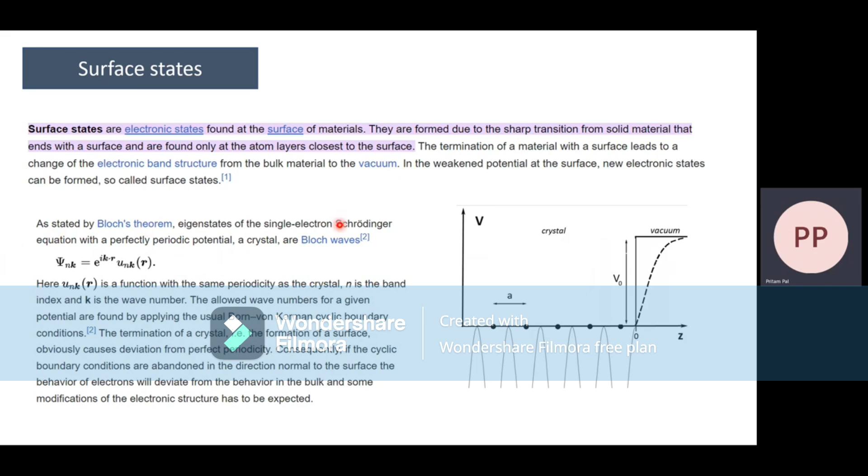So that's figure two. This is the first type of states that's basically extending into the crystal and has a Bloch character. Bloch character means this equation needs to be satisfied over a certain period, with the crystal lattice. That's what the Bloch theorem states, right?

So this type of solution corresponds to the bulk state, which terminates in an exponentially decaying tail reaching into the vacuum. So once it reaches the vacuum, it will decay further. That's what has been shown here.

There's a second type, as seen in figure three, that decays exponentially both into the vacuum and the bulk crystal. So this type of solution corresponds to the surface state with a wave function localized close to the crystal surface. You can see it's also decaying exponentially inside the crystal. So

the first type of solution can be obtained for both metals and semiconductors. In semiconductors, though, the associated eigenenergies have to belong to one of the allowed energy bands. The second type of solution exists in the energy gap of semiconductors as well as in local gaps of the projected band structure of metals.

It can be shown that the energies of these states all lie within the band gap. As a consequence, in the crystal, these states are characterized by an imaginary wave number, leading to an exponential decay into the bulk. Okay. So next, please listen to this part very carefully because this will tell you how the surface states are. This is the typical band structure in an E versus K diagram.

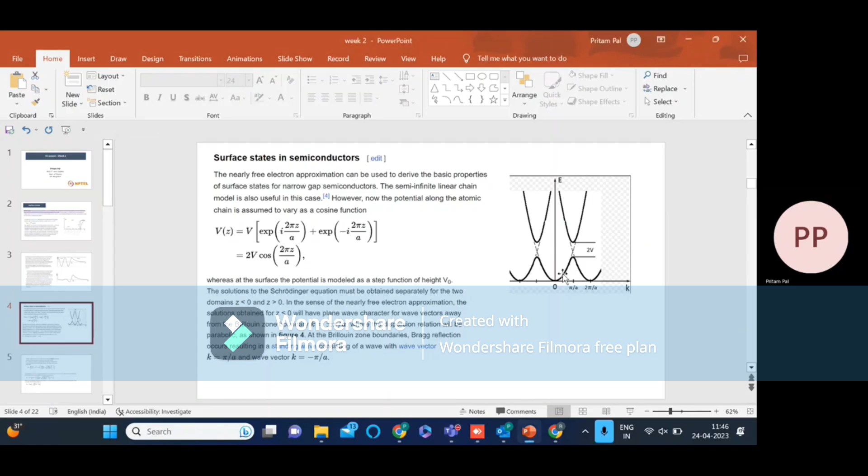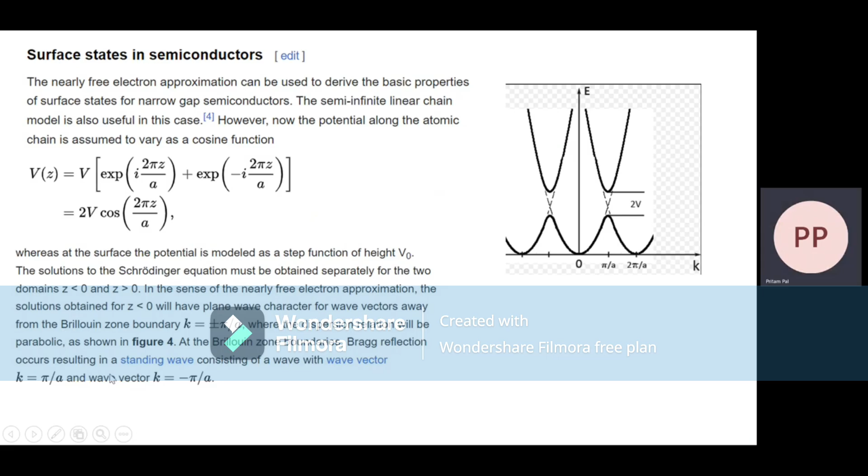This potential, yeah. This part was already mentioned, and this is away from the Brillouin zone boundary, right? Where the dispersion relation will be parabolic, as shown in figure 4. So at the Brillouin zone boundaries, Bragg reflections occur, resulting in a standing wave consisting of a wave with wave vector k equals pi by a and a wave with wave vector minus pi by a, right? So here you can see, let me turn on the curves.

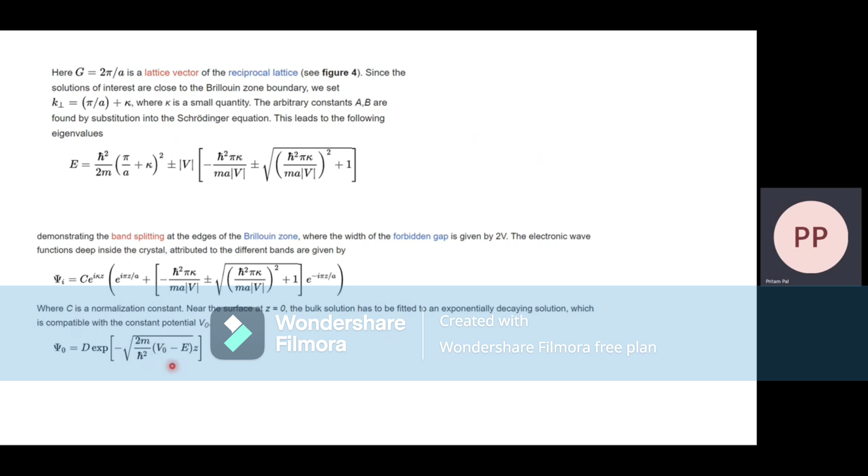Where C is the normalization constant. Near the surface at z equals 0, the bulk solution has to be fitted to an exponentially decaying solution, which is compatible with the constant V naught. So psi naught equals, as mentioned, the exponential of minus square root of 2m over h-bar squared times V naught minus E, times z. So it can be shown the matching condition can be fulfilled for every possible energy eigenvalue which lies...

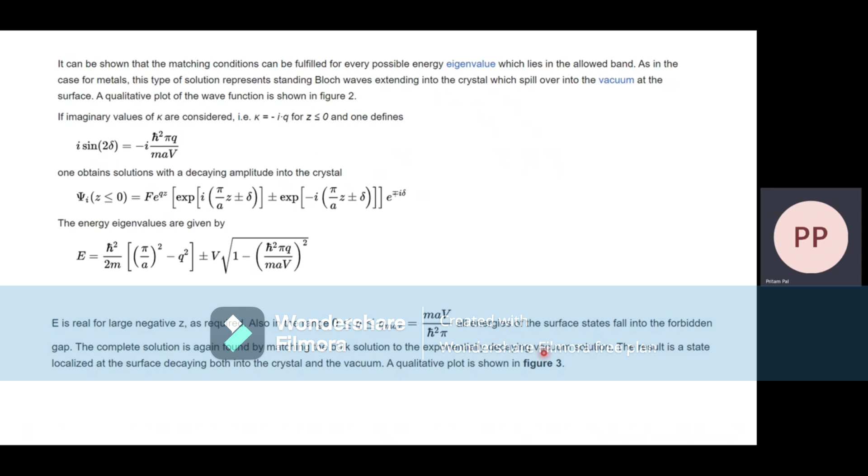E is real for large negative z as required, also in the range 0 less than q less than q max, where q max is m a V by pi h-cut squared. So all the energies of the surface states fall into the forbidden gap. The complete solution is again found by matching the bulk solution to the exponentially decaying vacuum solution. The result is a state localized at the surface, decaying both into the crystal and the vacuum. The qualitative plot is shown in figure 3.

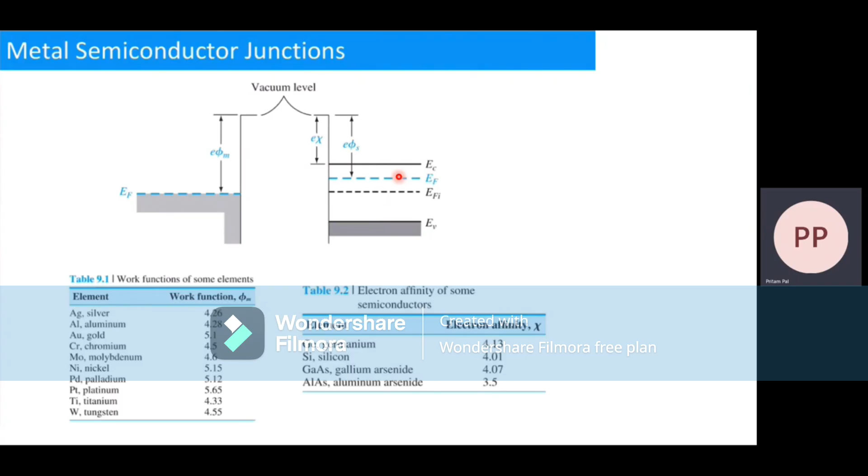What happens? To understand, we'd like to draw this diagram. I've already drawn all these things, so let us say we have a Fermi energy level. We're taking a semiconductor, which is, let us say, an N-type semiconductor. This is the conduction band edge, and this is for the valence band. And this is your Fermi energy for the semiconductor. This is for the metal.

Now the question we want to answer is what happens, right? So we have brought this metal and N-type semiconductor into contact. What happens? Well, the Fermi energy is essentially a measure of the energy, right? It is an energy level at which the probability of finding an electron is high. If the temperature is high, it is going to smear out. The smearing out is given by the Fermi function, right?

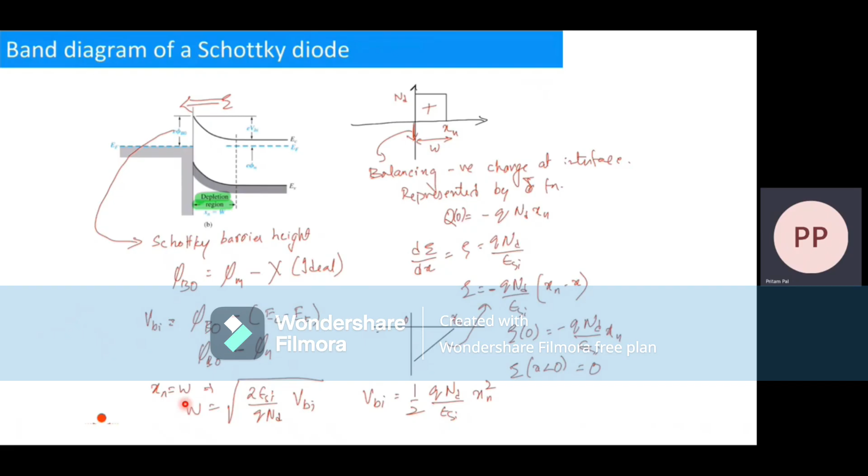So this is how the metal semiconductor junction is going to behave. This is very, very important. Okay. So this is without the applied voltage. What happens when you apply a certain voltage? With applied bias, same story as PN junction. Whenever we apply a positive bias, let us see what will happen.

When V is positive, Fermi level lowers, right? When V is negative, Fermi level goes up. So when V is less than zero, the Fermi level is going to go up. So in a way, you could think of it as you keep the E_F in the bulk of the semiconductor constant, or you hold it fixed, and you move the E_F in the metal. So if you're applying positive voltage, the whole band moves.

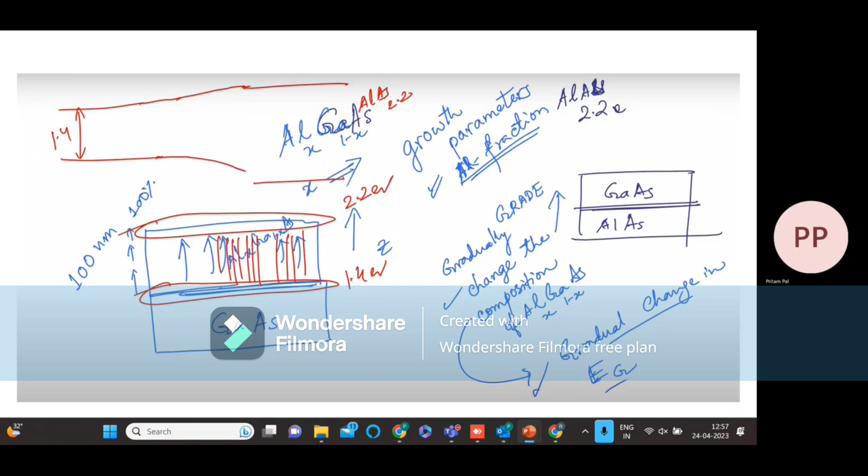You have, so we take the slope. No, you have an electric field. Remember this, I already discussed it. By the way, this is for the electrons actually. For holes, it will be the slope of the valence band, and we always only write the conduction band because historically we have been taking the band gap as the same. There is a slope in the conduction band, as you know.

Then I say the slope of the conduction band gives the field. So instead of this structure, for example, I'll have a structure like this, like a bending, with the band gap the same as EC. So then your field will be different, and because the field is different, your acceleration will change, and you experience a different kind of potential.

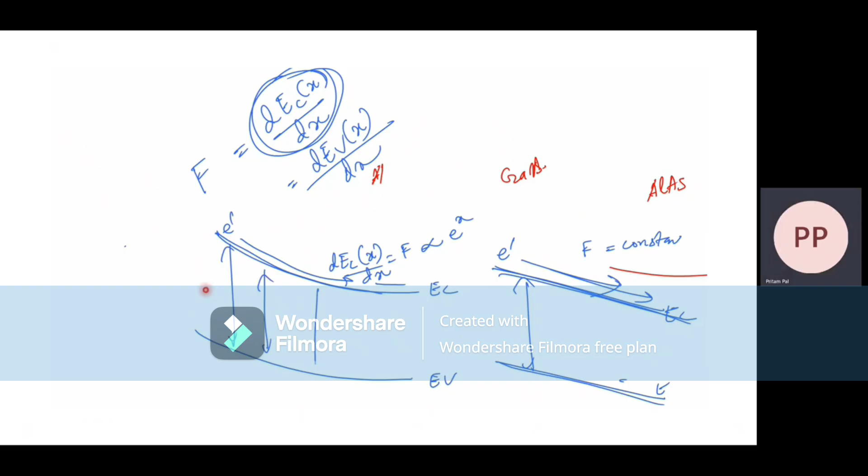And the way you practically grade this kind of thing is that you increase the aluminum composition. By the way, this one is not graded. This is only a constant material, but with the heterojunction you can actually grade it and do even more. You have more flexibility in this case.

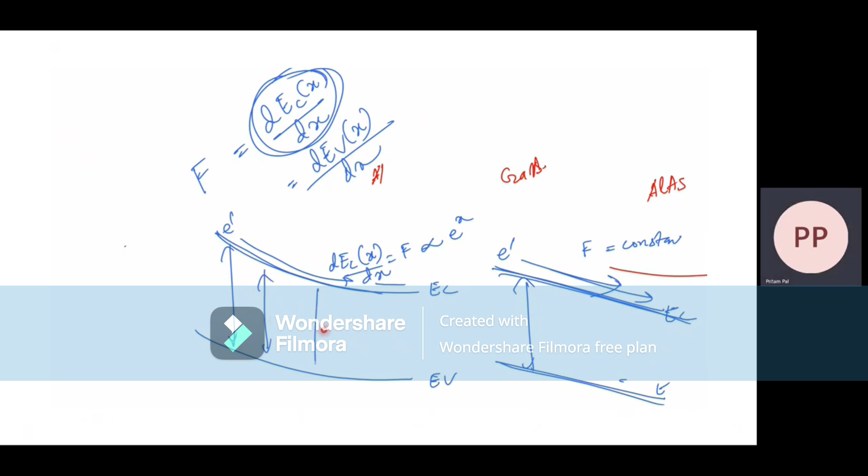What I mean by that is, when you are grading linearly, suppose you have something like this. So this is gallium arsenide, and this is aluminum arsenide. This part and this part are forming the heterojunction. You might have another where it's just a grading. There's a field. So this part is a constant field.

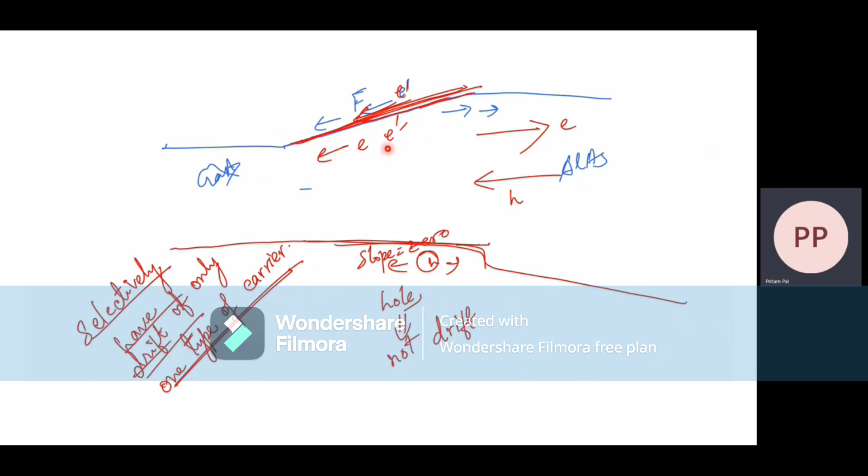Look very carefully. So this field is the slope of the conduction band. The conduction band has a different slope from the valence band. This was not possible in a silicon sort of thing. Here the slopes are different. So it all depends on the slope, how the band curvature is. So in that way we define all these things.

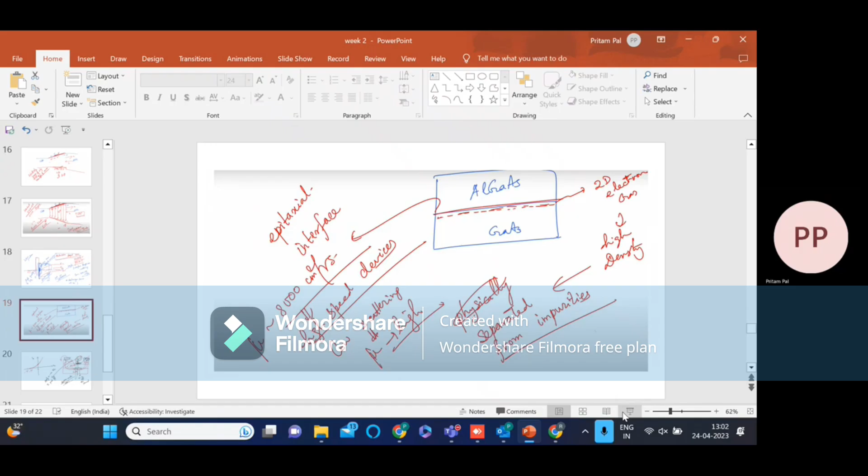So, but now I'll come to this portion. Okay. So here what happens? Changing. There will be a layer of undoped gallium arsenide. Okay. Now let's think about this situation. So there will be a layer, thin layer of undoped aluminum gallium arsenide. This one. Okay. Of the same composition as this: if it is 30%, this will be also 30%.

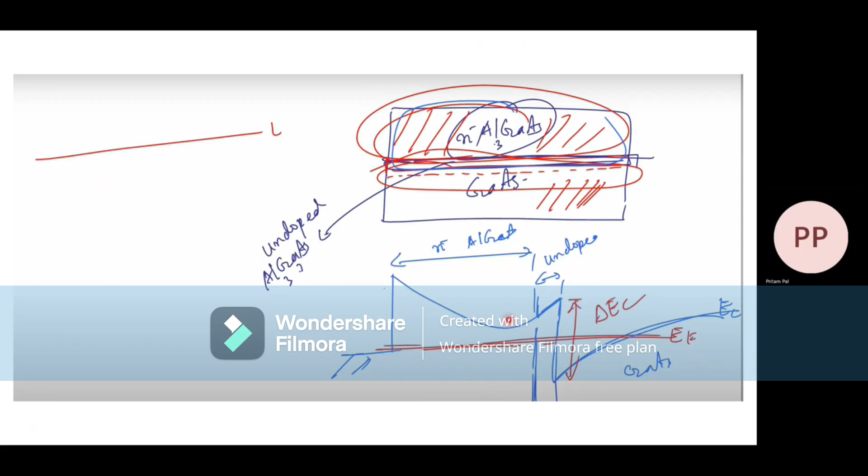So if I draw on the next slide here, one second. So essentially, this is your Fermi level. Okay, this is the conduction band, this black color line. The valence band will also look like this, exactly like this. So this is your Fermi level. Okay.

So this part is your n-doped aluminum gallium arsenide. Here aluminum gallium arsenide, this part is a few nanometers, undoped. This is delta EC, and EC is the conduction band. The Fermi level is actually above the conduction band here, this part. So this part has a high density of 2D electron gas, and it has formed because of this layer; they are donors now. So they are donors here.